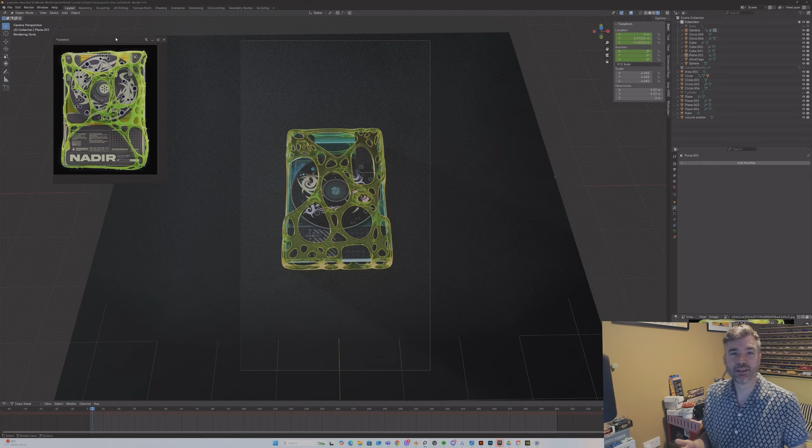Been a busy couple of weeks, but I'm back again with another tutorial where I take one of the reference shots that I found on Pinterest, which is always my go-to, and attempted to recreate it in Blender. And I really like this tutorial because it's one of those projects where years ago when I was starting out with Blender, I would never have thought I'd be able to make something like this. And even just looking at it when I started trying to recreate this, I was like, how am I going to make any of these parts? And it turns out that actually all the parts are really simple.

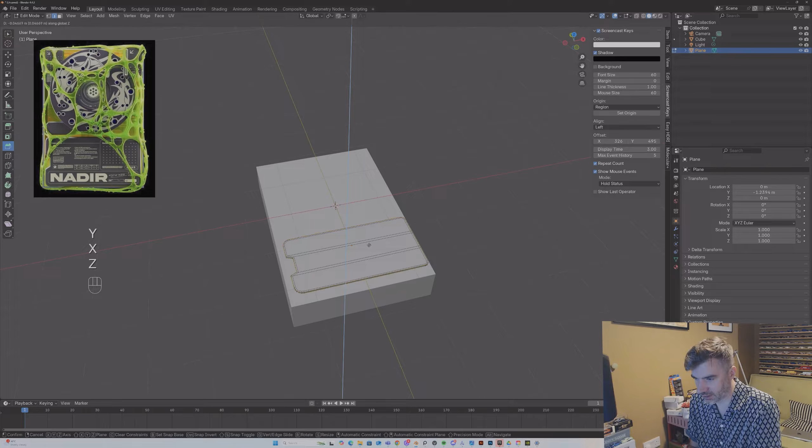But I do want to make like a little lip. Can you see there's like a metallic lip that runs all the way around, and then this brushed powder coated surface on top. So hit A to select everything, hit I to inset, and then we'll just pull in like this. And then finally go into edge mode and alt click on the edge. It should select everything, and then we can hit E to extrude down, and hit Z, and just give it a little bit of depth like that.

And there we go. Shade auto smooth, and we should have something that for our purposes looks good. So let's position this properly. Looks like it's a little bit off, and we'll have it just resting on the surface like that. Cool. So now let's build each of these other four. So it's going to be the same process. So we're going to make a new plane.

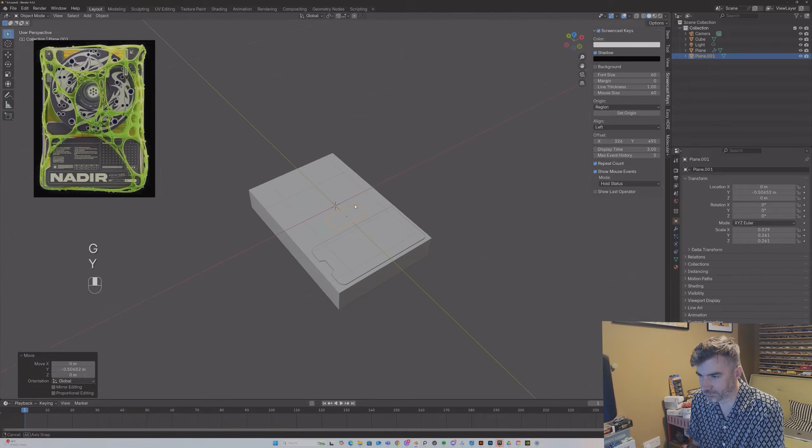So this one, because we can't really see what's going on underneath, I'm just going to bevel all of them with an angular bevel. So scale down, and I want this to be long and thin, so something like that. Just scale a whole lot. Doesn't need to be exactly the same. Just going to get roughly.

Let's work from overhead. Something that's worth doing at this point is to go to our drop down on shading and change this to random so that every object has a different colour. It makes it much easier to see what we're doing. None of this will render, it's just for viewport purposes.

Okay, so we're just going to apply the scale before we go any further so that our vertices bevel correctly. And with those selected, make sure you got bevel and drag, and nothing will happen until you change that to vertices, and it's going to be too big. So we'll scale it back to there. Honestly, that should be all we need.

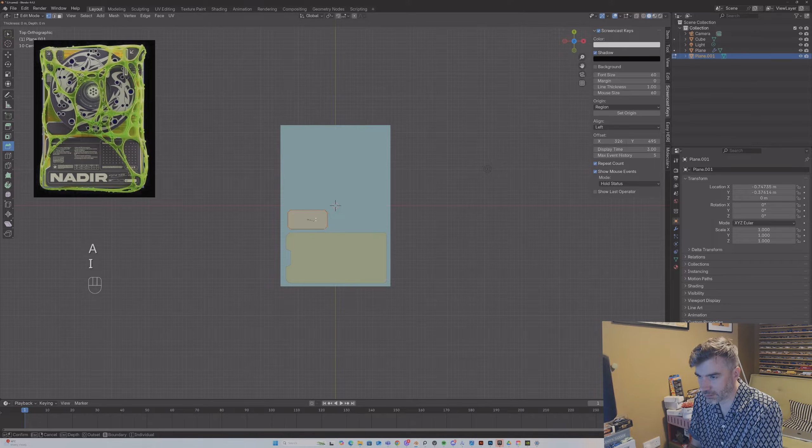And we'll just hit 3 to make sure we're in face mode. Hit A to select everything, I to inset, and it might be too sensitive, but there we go. So we'll try and keep our bevels pretty consistent. Something like that. And then we're just going to select these edges, extrude down. Just maybe a little bit deep. And we'll just pull this one down into place as well. Okay, so that's two done.

And let's tackle this top one. I think we could actually just use the same piece. The only one that looks different is this one here. So let's use the same one for the top. So we'll move it up. And you can see because we duplicated it, it's changed a different colour because it's a different object.

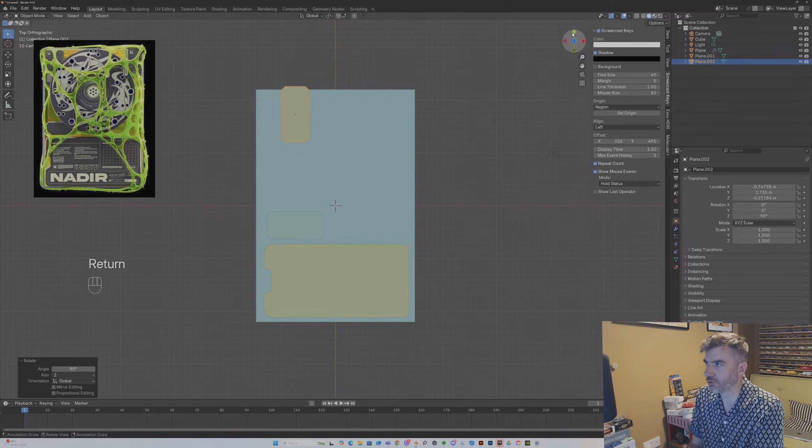We're going to rotate it 90 degrees. Let's snap to the top view. And let's position it something like that. And then we're going to tab into edit mode and make sure you've got X-ray selected. We're going to drag a box around all of these and pull it down so we get something like this.

I can see now actually that this tapers in, so that's kind of easy enough to do without remaking everything. So let's put a cut in the centre there, and because of how our geometry is formed, we need to put a cut across. So we're going to do Control R and put a cut there. And if we select those two vertices, we can just hit J. And now we can drag all of this down, something like that.

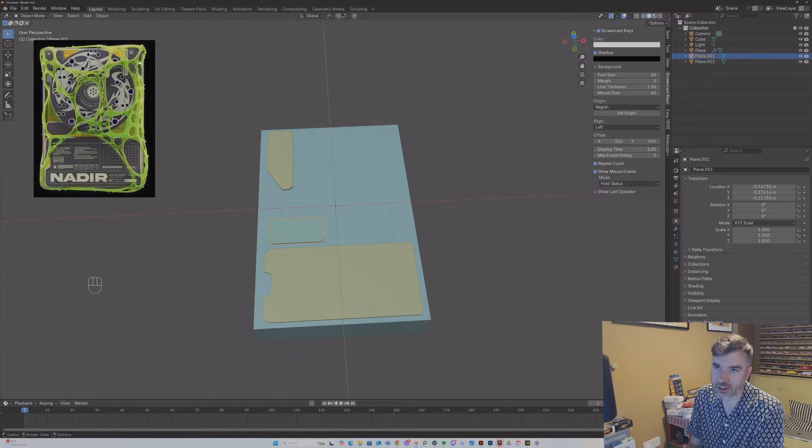And then I'm just going to move this in like that. And this is going to be covered by our spinning CD thing anyway, so it just might add a more interesting shape. Turn off X-ray and see how we're looking. And let's take this object and do the same thing again, and we'll try and work in a little detail in the corner. So snap to overhead view, and again it's a different colour.

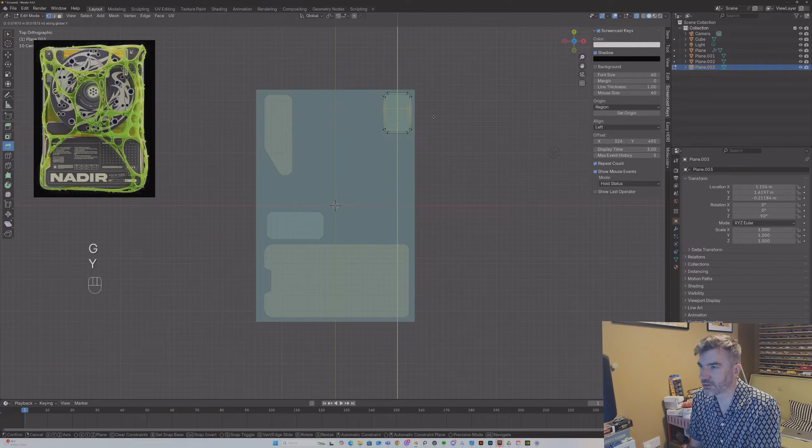We'll rotate it through 90 degrees on the Z-axis, pull into the corner, turn on X-ray, and we're just going to select these vertices, and this one wants to be much smaller. And so let's put our cut in there with Control R and our cut there, and then just join them up. And now we can select these. So I think if we do another cut there, Control R, another cut there, Control R, Shift, select them, and then J to join up.

And then if we just select all of these, hit S to scale on the Y axis, and then type in 0, it'll straighten it out. And then we can move this up, and then let's try pulling this over to the side like that. And maybe this wants to pull down a little bit. There we go. This is more interesting than it was before, and it adds a bit of variety. So it's completely up to you how you want these to look.

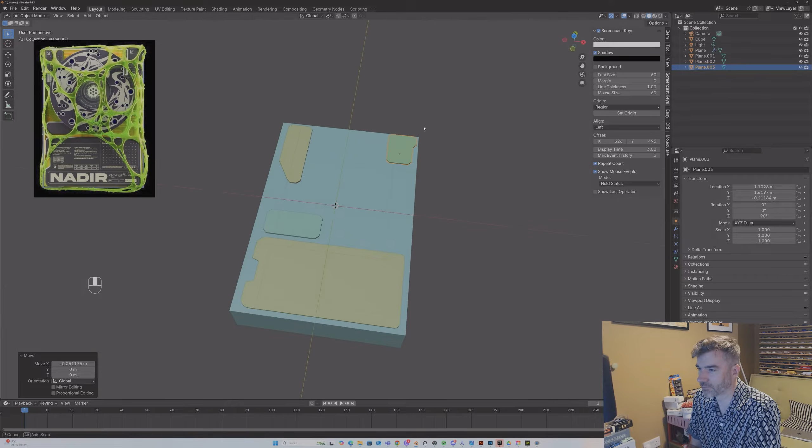Okay, so that's all of our metal plates. What I want to do now is put a slight bevel on everything. So we're going to select this one, go to modifier, add modifier, search, and mine's up there already, but if it's not, type in bevel, and that's kind of what we're going for, but it's a little bit pronounced. Hang on, let's just drag this up and down. There we go. So because we've applied our scale, everything's working as it should do.

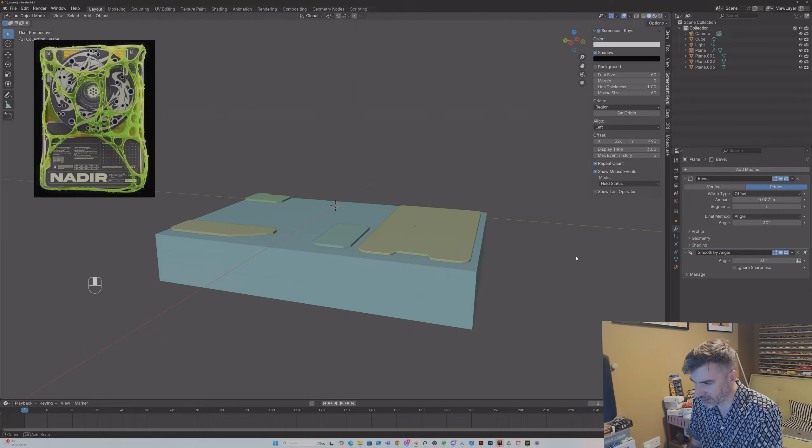Sometimes you might need to go to geometry and turn off clamp overlap, but it looks like we're okay here. So we're just going to scale this until we get something like that. So it's just got a little highlight edge, it'll just catch the light better. And we want to apply that to everything else. Rather than having to manually create our bevel, if we select all of these, shift select, and then select this one last, hit Control and L and choose copy modifiers, now everything's nicely beveled and it's looking better already.

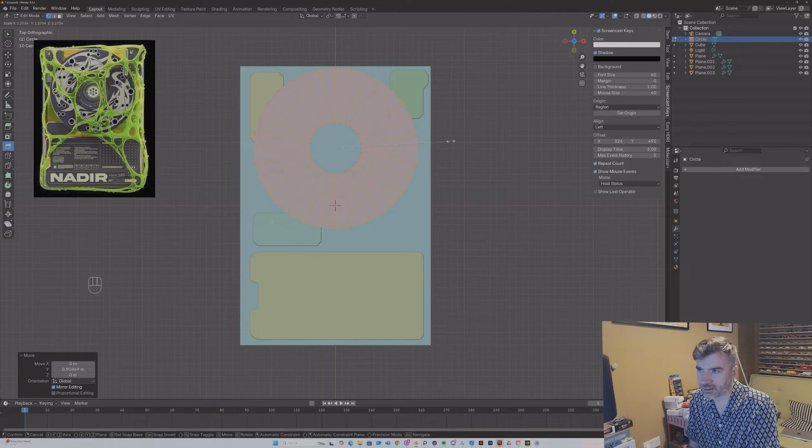Okay, so let's make a placeholder for this CD shape. So Shift A, mesh, and we'll do circle, and we'll just pull it up a little bit, and all we're going to do is tab, hit E to extrude, S to scale, and pull this in, something like that. And then let's go to our top view, select everything with the A key, and we can pull it up and position it, so it's going to be something like that. And now let's pull this down, so this wants to sit above these plates, but this one then sits above that.

And let's just select everything, push the 3 key to go into face mode, then hit E to extrude and pull this down. So I've just got a little bit of depth. That's maybe a bit thick for a CD, but it's just so we can make sure that everything sits as it should do. Okay, and then all of this stuff we can add in later on when we do our detail pass, but let's make a placeholder for the center as well.

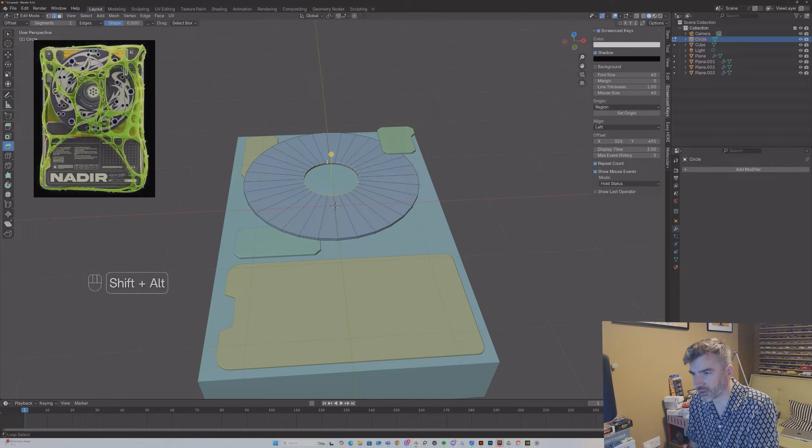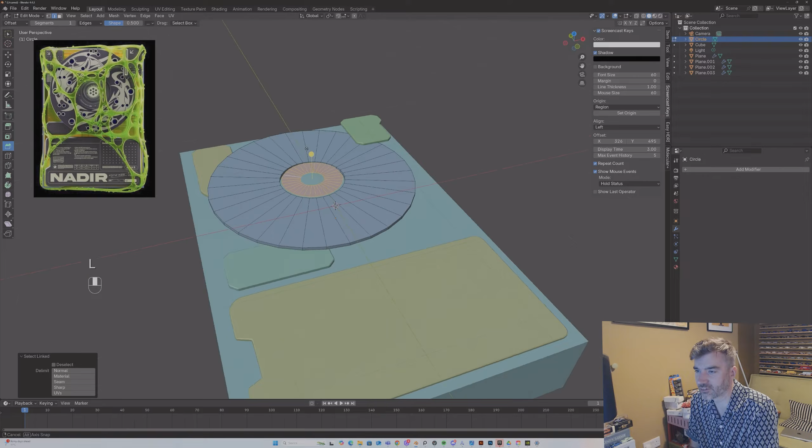So we're going to select all of this, Alt Shift, and then click on an edge, Shift and D to duplicate, and then S to scale, so we know that that's matching up, and then we'll hit E to extrude again and scale. Whoops, sometimes it gets a bit weird. We don't want to hit A because it's going to select everything at once, so if we now hover over and hit the L key, select linked, and then hit E to extrude and pull that down. Okay, so we've got the basis of everything in place.

And then the last thing we need to do is put another box over the top that's going to be our mesh. So we're just going to select this one, duplicate it, Shift and D, and we're just going to scale it out slightly and pull it up to make sure it's covering everything. And then if we select this bottom face, pull it down, and there we go.

So now will be a good time to just name everything. So we will name this one, I will call it slime mesh because I can't think of a better name, and we'll just hide that for now. And then we're going to call this acrylic box. I'm just using F2 to rename everything.

And then this plane, we'll call this, I think they look a bit like dog tags, like military dog tags, so I'm just going to call them that for now. Dog tag 1, dog tag big, and then we've got dog tag small center, dog tag top left, dog tag top right, and then we're going to select all of these.

Oh, we forgot to name the CD, so we know that's a circle. We can do that in a second. I'm going to select all of these, control clicking, including the hidden slime mesh, then hit M, move to new collection, and we're going to call this guide mesh. We are going to end up using a lot of these for our final geometry, but I like to keep everything organised like this. So acrylic box also needs dragging into guide mesh.

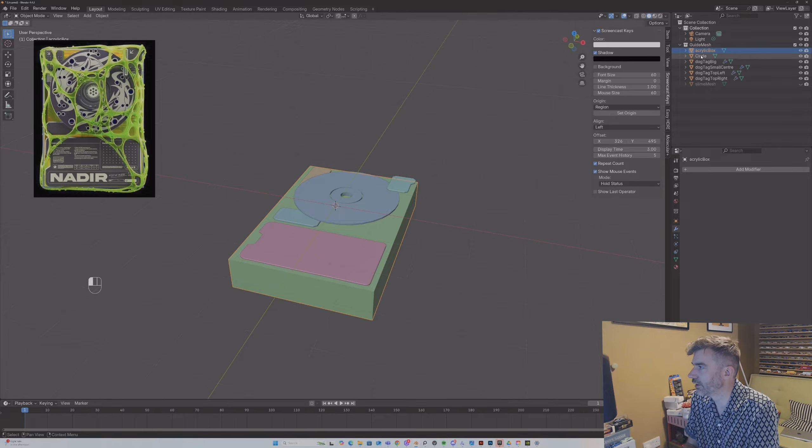Here we go. So I'm just going to call this CD. And let's see how we're looking. It's interesting, every time you name something it gives it a new colour. Cool. I'm actually just going to duplicate our bevel onto the acrylic block, so we'll select the box first and then the dog tag next. Control L, copy modifiers, and again everything just looks a bit nicer with a bevel.

We'll leave the CD for now, but now is a very good time to save. Can't think of a good name, so we'll call it Slime Drive 1. As you'll know from my tutorials, I like to put a number after everything so I can save incrementally, and that means that I can roll back to an old version if there's a crash or I just run out of undos. So I'll hit save as.

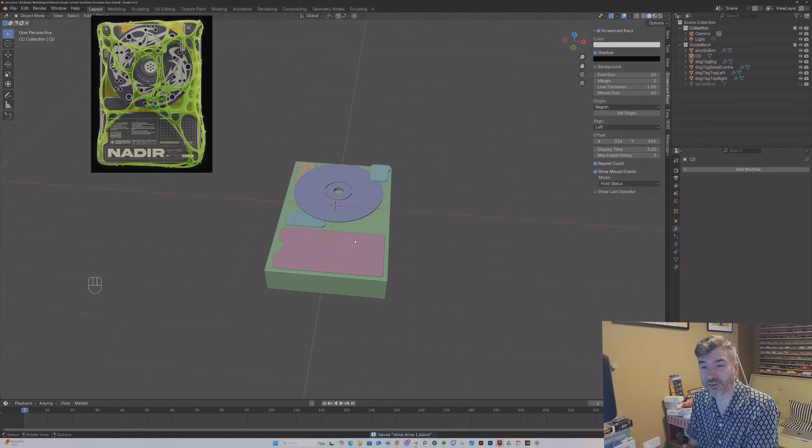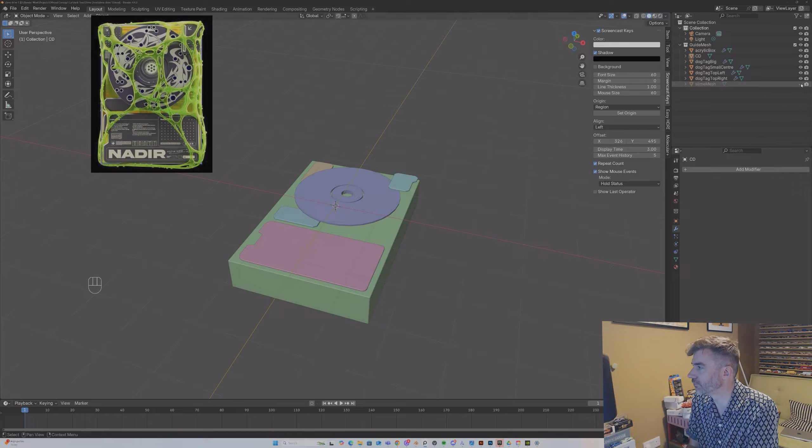Okay, so let's get into the real meat of this. So the two most difficult things to make, or the things that look like they're going to be most difficult, are this CD and this slime netty grid thing. So let's do that first. So we've got this mesh, and what we're going to start to do is cut into the faces using the knife tool roughly where we want these bubbles to form. So we're going to start at the top and we're just going to cut loose shapes out. Now mine's not going to match perfectly, but we basically want to make a face everywhere that we're going to put one of these bubbles in.

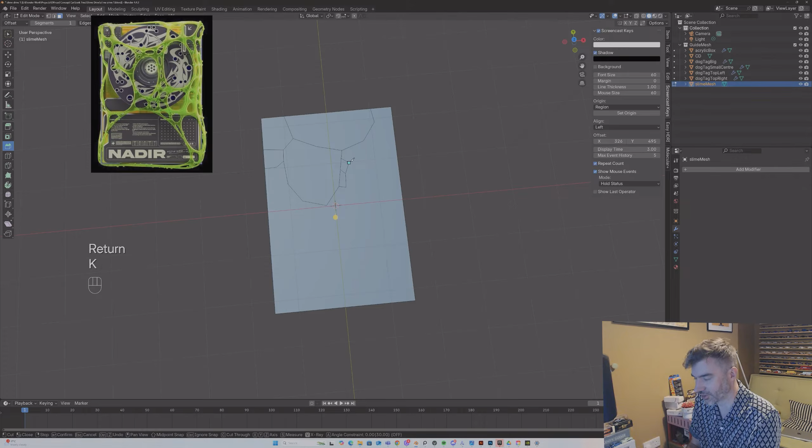So you do not have to follow me, you don't have to follow the reference. The more kind of random you can make it, the better. But we just want to keep linking back up to points. So we're cutting with the knife tool, using the K key to reselect it every time. And maybe let's make some little ones in here. Something like this. And this is horrible topology, but it doesn't actually matter for what we're doing. So we'll just keep making these cuts.

Back into knife mode. Let's make another big one here, and you can cut them right up to the edges, and we'll extend round the sides in a bit. So we're just going to keep making these shapes. And like I said, it doesn't matter how closely yours follows the reference or follows mine. This is your own piece of work, so the more interesting and unique you can make it, the better. No idea what I'm going to end up with here. And we'll just find some kind of links between here.

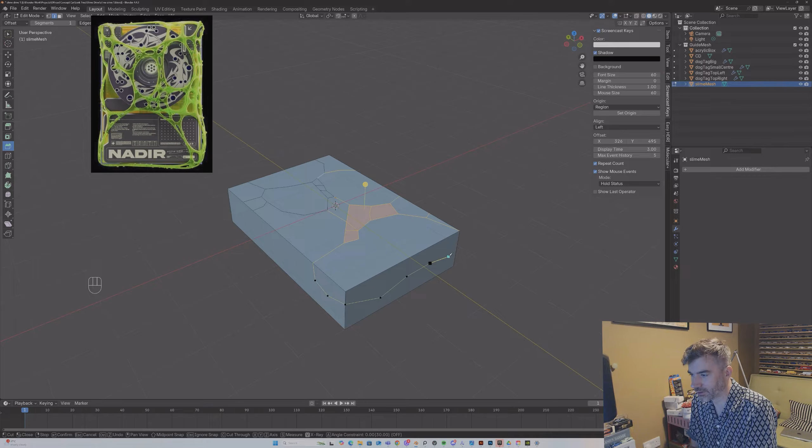So we're going to apply a bunch of modifiers in a second to make this the effect that we want. We need to think a little bit about what happens around here as well. So let's carry on looping around. Something like that. And then we'll link that to the corner. I think we're going to end up deleting this bottom face anyway. So I'm just going to speed through this a little bit more. You can take as much time as you want to make the effect that you want. So you can see we're building this like cracked, fractured shape.

And I know it looks bizarre at the moment, but I promise you it will look cool. Well, hopefully it will look cool when we finish. I want to keep this as an exposed circle as well, so we'll do something like that. Nearly done. And like anything in Blender, the more time you can spend getting it the way you want, the better. Let's put another cut through there.

Now the sides are less important because they're not going to be particularly visible in our final shot. You can see that we're mainly viewing from overhead, so I'll just keep linking these up. Okay. I think that should do us. So just check that we've got kind of interesting details all around, and then we're going to use our first modifier. So if we go to add modifier, search, and then type in wireframe, and this will already give you an idea of what we're going to do.

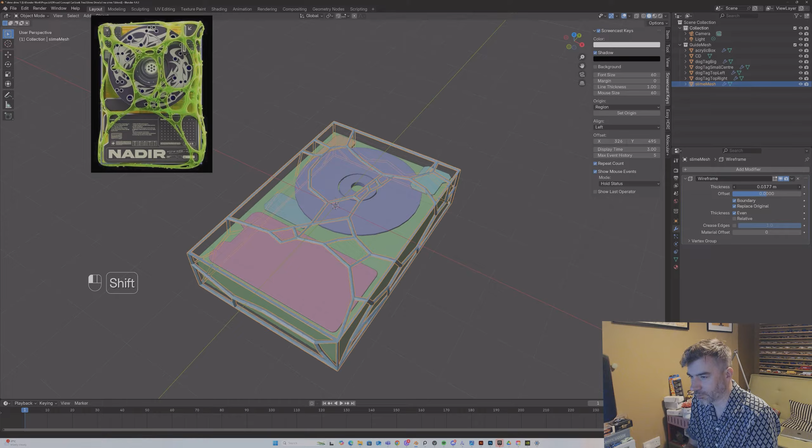So it's taken every one of those edges and turned it into geometry. So we've got the start of this, and we're just going to bump the thickness up a little bit. And you might notice that some bits look a bit uneven, or you might have some slightly crunchy geometry depending on how it's set up. So make sure you've turned on boundary, and we can play around with the thickness of this, but we'll get more of an idea of what's working when we've added our next modifier, which is our subdivision surface.

And you can now see some of the magic starting to happen. So we're going to bump this up to 2 for now. In fact, we might need to go for 3, and then right click and shade auto smooth. And you can now see that we've got this kind of bubbly, curvy, warped effect. And we're actually not too far off. If you want to add in some more smaller bubbles, we can select a face, right click and choose subdivide. And that didn't do anything, so we're going to do it manually.

Oh, I see why that happened. Okay, so if we can now select these 2 vertices and hit J, these 2 vertices and hit J, and then tab out, and you can see we've made some smaller bubbles. Maybe I want something, do I want to make this one smaller? Let's subdivide this face as well. I'm going to have to do the same thing, so we could just cut some more faces in. There we go, we've got some interesting stuff going on.

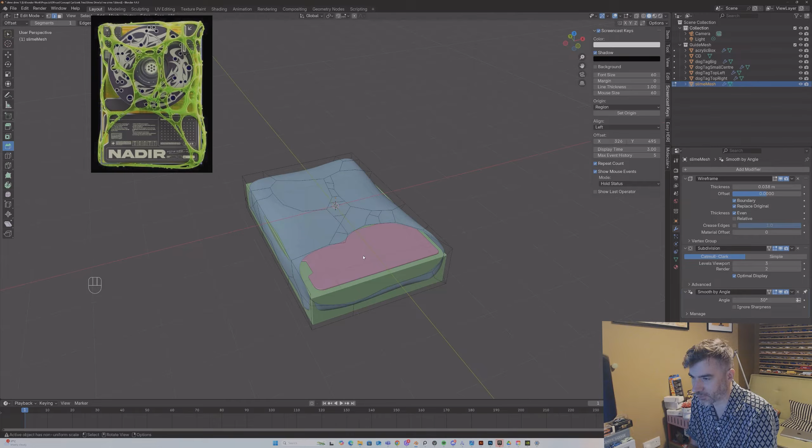And this edge here, I want this part to actually run over the side. So we can just select this edge, make sure you've got your edge selected, and then hit X and delete edges, and it looks like something scary's happened, but if we tab back in, you can see now it kind of runs over the side. And is there anywhere else I want to do that? Maybe at the top as well, so I'll do the same thing. Right, click on the edge, not right click, sorry, X, delete edges, and there we go.

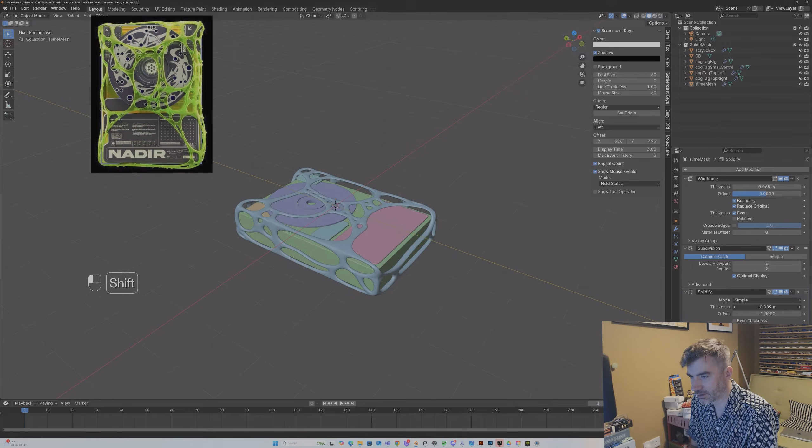And we can bump up the thickness a bit, make it look more organic. We can also add a solidify modifier at this point and put it at the bottom, and then if we increase the thickness, oh, things get a bit screwy if you go the wrong way. We can just give it a little bit more thickness and depth, which would be nice when we render our gel effect. So that was easier than anyone was expecting, right? I think I've made this a little bit thick now, so let's just turn down our wireframe but keep our thickness. There we go.

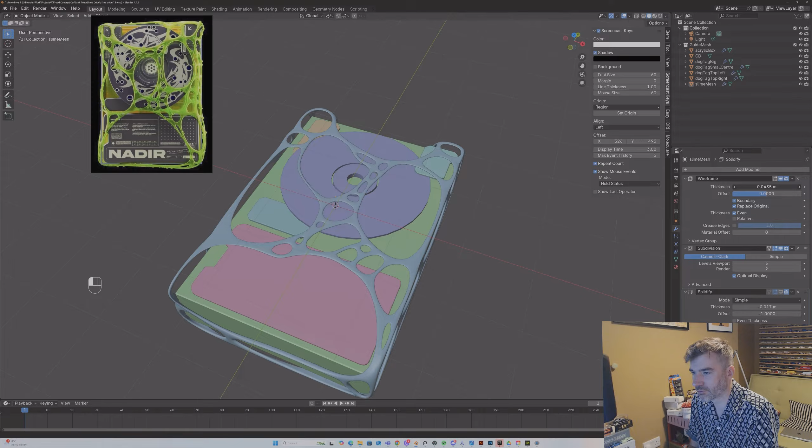Cool. It's looking nice. And you can keep going in and cutting and tweaking, and all of this is still editable. So if you tab back into edit mode, and especially if you turn off your solidify modifier, it might make it hard to see what's going on. You can keep changing the shape, adding in more cuts where you want them. So that's the beauty of modifiers, it's all fully editable. Like, you might decide that some bits are too weird and thick, and all of this can be changed and played around with. Cool, something like that should do us for now.

Nice. Okay, let's tackle the CD, the second scary part of our project. So I'm going to hit backslash, so I'll go into solo edit mode, and we're going to snap to the top view, and we're actually going to use this just as a guide because we're going to make everything from scratch again. So if I go to object, set origin, oh, my reference is in the way, set origin to geometry,

so it snaps back into center, shift S, cursor to selected, and then we're going to make a new circle, so mesh, circle, and now my reference is in the way here, let's put it there. I want to make this 64, and we're going to get it roughly to the size, and I'm actually just going to delete this because I don't want it for now.

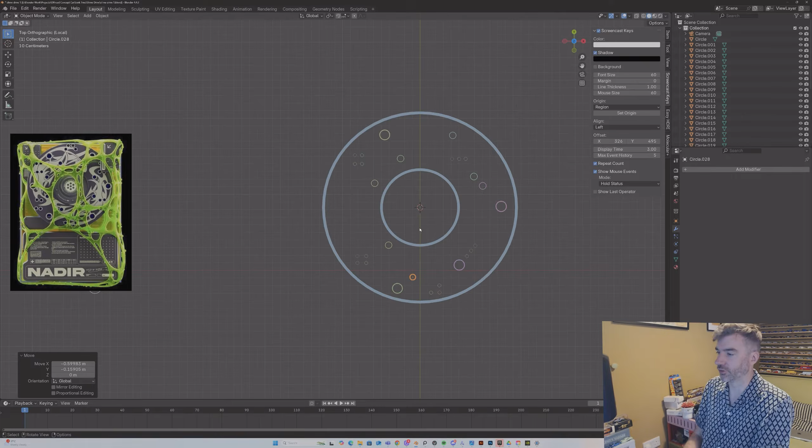So now what we need to do is select everything with the A key, and then select this part of our CD again and hit Ctrl and J so everything's joined. And now we're going to fill in all of these faces, which is way easier than you think. It looks like everything's selected already, which saves us a lot of work, but let's do it manually just in case yours aren't.

So Alt select the edge, Alt Shift and click, and we're going to click on each of these outer edges. So you might need to zoom in a little bit as you go. So we'll just work our way around, and this is an easy or a hard job depending on how much geometry you've made for yourself. So if you select anything by mistake, just undo, Control Z. So again, that's selected the wrong bit.

I'm going to have to zoom in a bit. That one's proving really tricky to select. Nearly done. One last tricky bit to do. And make sure you're selecting the outer loops, not the inner loops.

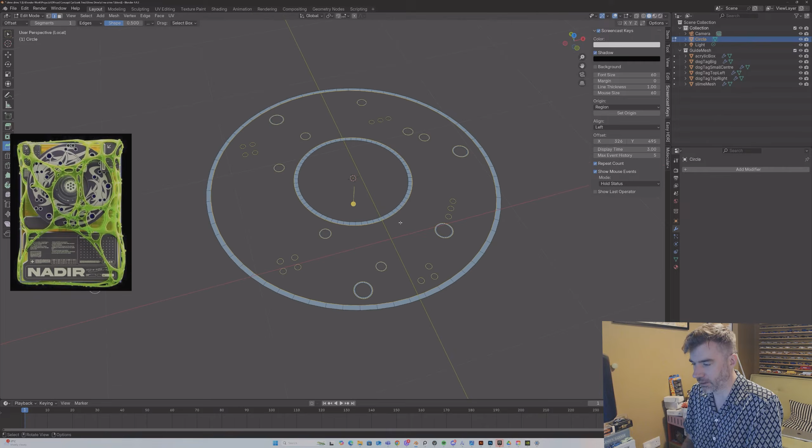Okay, perfect. So now all we need to do is fill the faces, and the shortcut for filling a face in Blender is F, but if we do that, it's going to fill all of the inner faces, and you can see it's a bit of a mess. So we're going to use Alt and F, and now we have this magic, and it's joined everything up neatly.

If you found that your geometry looks a bit weird, say it looks something like this, just select everything and scale on the Z-axis, make sure everything is flat, because sometimes things can get moved around.

So now we have the basis of our CD, and I'm just going to give it a bit of depth. So we're going to select that edge, and then, in fact, no, we'll just select this edge for now, so we're going to extrude down like this, pull down, and then if you look at the reference, there's like a little step down and then this clear plastic part. So let's carry on making that.

So Alt Shift select this edge, and then we're going to hit E to extrude, S to scale, and then we're going to hit G to put it down on the Z axis slightly. So we've got our step, E to extrude again to put an edge in, and then we'll just pull it into something like this. And we will look at if we want to make these cutouts in a second.

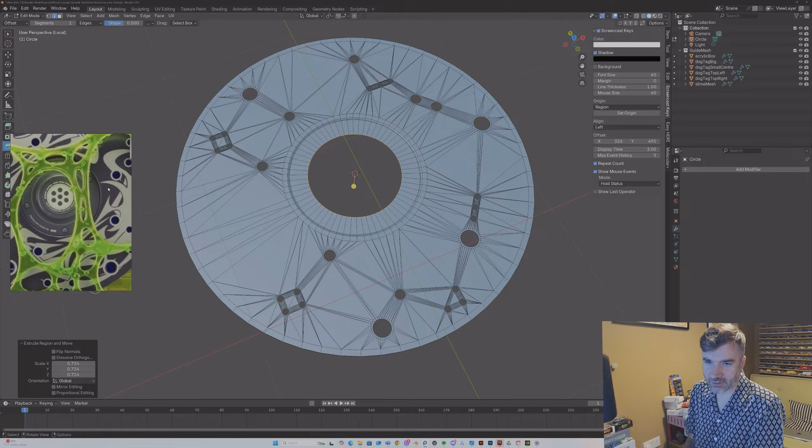Let's try and get a sense of the scale of this. So this wants to be bigger, and then it's a little bit hard to know what's going on here, like some kind of spindles coming through. I think that's how we're going to do it. So we'll just put another edge in there, and then we'll just hit E to extrude down on the Z. And I just want to give this a bevel as well. So I have modifier search, bevel, and let's see.

And we're going to increase the angle so that it doesn't... you see that when it's set to 30, it's stepping each of these edges. So we're going to bump it to 60, and then we're just going to reduce the size of it and put in an extra segment, and it just gives everything a nice effect. It'd be interesting to see if we apply a subdivision surface now what happens. I think it will work. So yeah, it's just smoothed over the edges, and we've kind of cheated our way to this nice geometry.

The only thing I've noticed is we haven't given these inner parts depth, so let's see if this works. So we're going to Alt select this edge and then go Select Similar, and we'll choose, let's try face angles. No, that's not the one I'm looking for. Amount of faces around edges. There we go. It's selected all of these.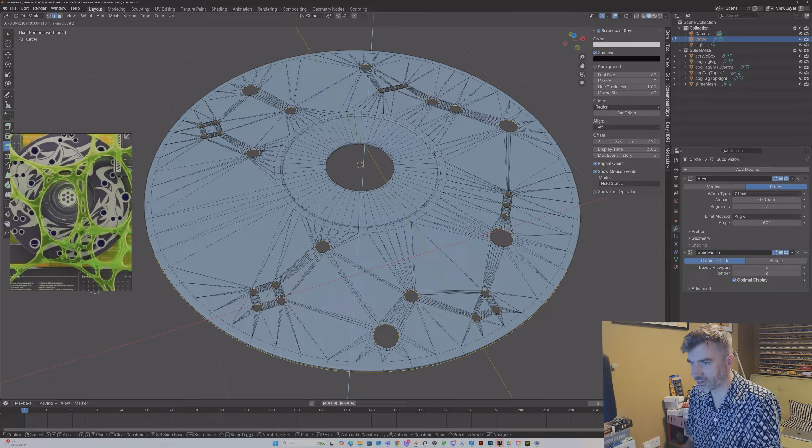It's also selected this, so we're just going to Alt Shift click on that to unselect, and then we can hit E to extrude down on the Z axis, and it might run a little bit slowly because it's trying to put bevel on it too. There you go, nice. So now I can tab back into our final piece. Because we're giving this a bit of depth now, let's select both of these and pull it up.

And let's quickly make this part in the centre, which again we're going to use the same technique to do, so it's going to be nice and easy. So we're going to start by selecting one of these edges, Alt Shift, and then Shift and D, S to scale, bring it in slightly, and then we're going to hit P to separate by selection. So now we should have this editable part. Backslash key to go in solo mode, and we'll flip to view over the top.

So we know we want a circle in the centre, but let's start by making a boundary edge. So A to select everything, make sure you've got edge selected, E to extrude, S to scale, so we've got a boundary there. And then in the centre we're going to make a Shift A circle, and it's way too big. In fact, let's delete that one and come out of edit mode, and we'll make our circle again so that it's a separate object. And you won't be able to see it, so let's type 0.2 so we can actually view the size.

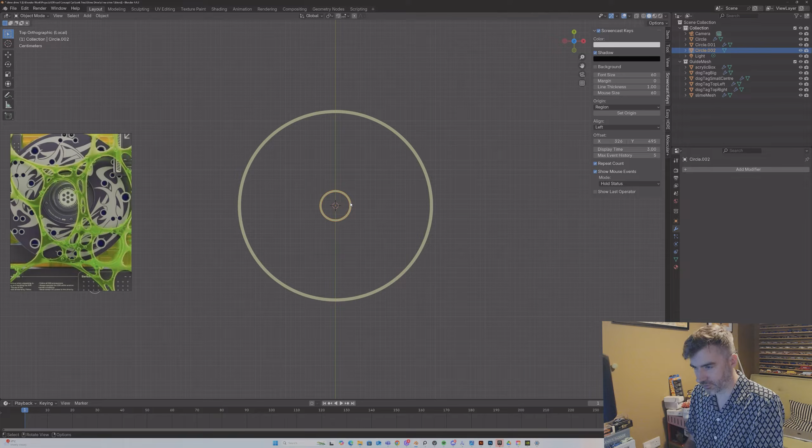So we want one in the centre, and then maybe like that kind of size, and then let's give it a boundary, scale, and then we'll go back into object mode, and then if we move this one up on the Y, something like this, and then we want to rotate it through 360 degrees, duplicating it as we go.

So if we hit the backspace key and choose 3D cursor and then hit rotate, it will now rotate around the center point. So we can now hit Shift and D, rotate, and rotate on the Z axis, and then we're just going to type in 360 divided by 6, and then we should be able to hit Shift and R to replicate that command, and there we go.

So we're going to do exactly the same trick, but there's actually like a little lip in here as well, so let's model that before we go any further. So we're going to select that edge, extrude and scale, and then we'll do extrude and scale again, and we'll pull that down in a second, but now we can extrude and scale one more time, pull that in fairly tight.

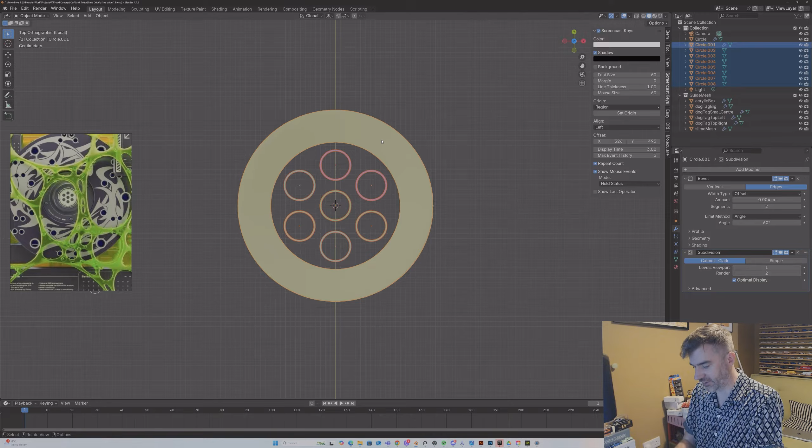And then you know the drill, so we're going to hit A to select everything, Shift, select this last, Control and J to join, and then select that edge, and then we'll work our way around, just holding down Alt and Shift as we go, and then Alt and F, and it will fill in our faces.

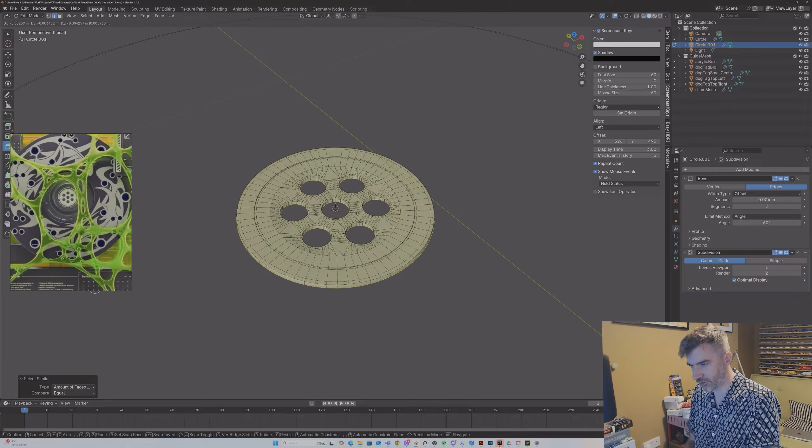And if we just select this edge, select loops, edge ring, and then you have to go into vertex mode and then into face mode. And we'll just hit E to extrude to pull that down slightly. And then let's select that edge, Alt Shift, select similar amount of faces around edge, and it will select all of these inner ones and that outer loop, which is exactly what we want. And then we'll just hit E to extrude and Z to pull down. And there we go, we've got our central detail.

So we're just going to select this one and then select that, and then hit Control L, copy modifiers, and it should take over our bevel and our subdivision. And things are looking real nice. Okay, so we're just going to save before we move on to the next part. Just check we've not got any geometry crashing into anything. I think we're good. So File, Save Incremental.

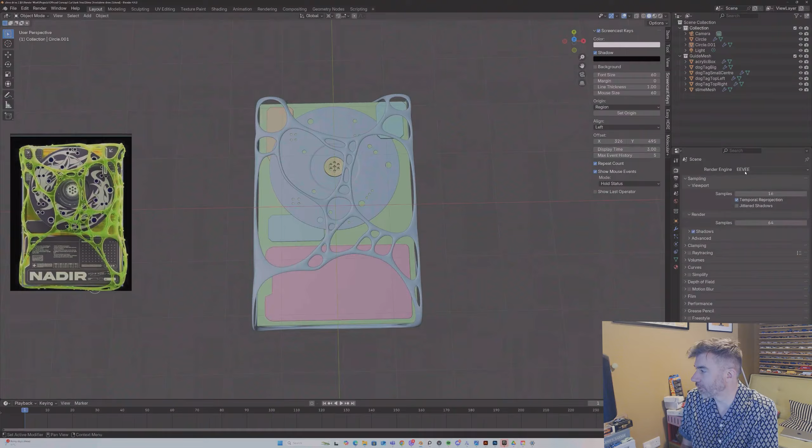So the next thing I want to get into is setting up our cameras and our lighting, and then we will look at doing our materials, and we're actually well over halfway into this project now. So I'm just going to go over and set my render engine to Cycles and turn on GPU compute, and then if we push into viewport shading, this is where we're at the moment. So I want to delete this light that we've got, and I'm going to bring in an HDRI, which I'm using the Easy HDRI plugin.

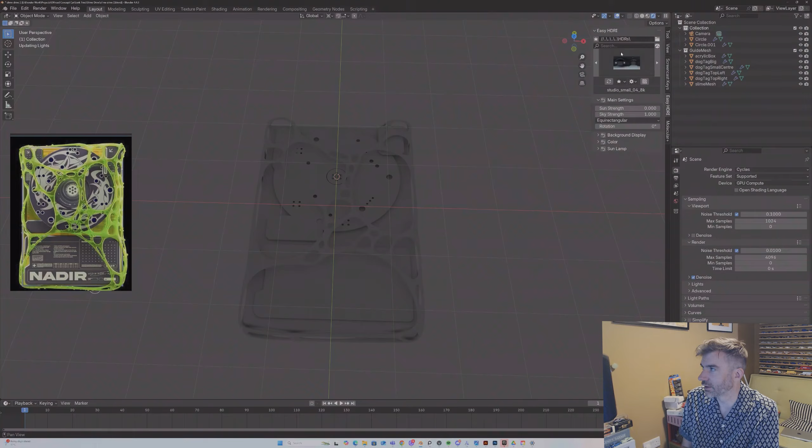I'm going to use the studio lighting for this, and then we hit create world nodes, and we've already got some much better lighting going on. So under render properties, we're going to go to film and choose transparent, and I'm just going to turn this down to 0.6, and then I want to add in a plane underneath. So Shift A, mesh plane, and we'll scale that out and just pull that down under our object.

And we'll just go into viewport shading, just for speed. In fact, let's use this mode so we can see everything. Okay, and then let's position our camera. So if we hit this button here to toggle camera view, we've already got a camera in the scene. If for some reason you haven't, hit Shift and A and go to camera, but there should be one by default. And then we're going to go to view and camera to view.

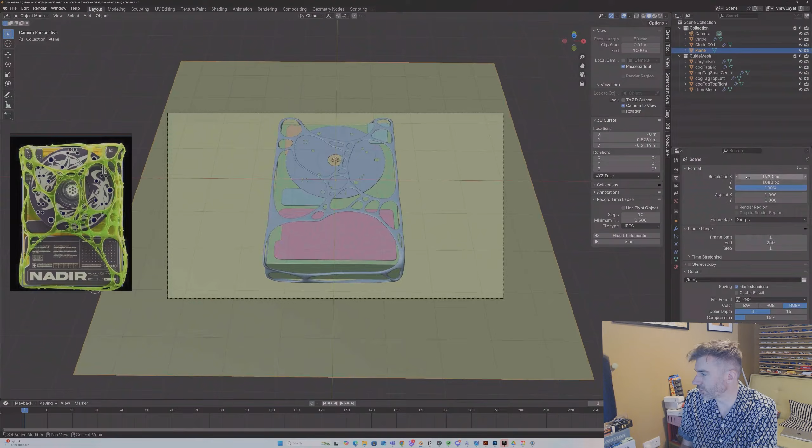And then let's try and match our shot as best we can, or however you want this composition to be. And I'm going to change the proportions so that we are, let's say 1080 by 1080, so a square. So something like this. Maybe a bit more. Yeah, something like that. And again, we can tweak this, it's only rough. And then when you've got something that you're happy with, turn off camera to view so that if I move my mouse away now, I can then hit that button and go back. So it's useful for making changes and keeping your view locked.

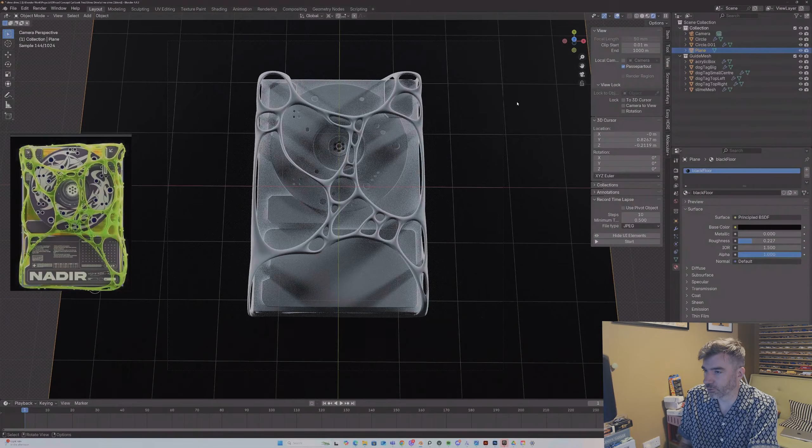So we'll go back into render mode, and I'm just going to give this a new material. So let's call this black floor, and we'll set the base color to black. And let's bring our roughness down so it's got a bit of reflection in it. And then I want to make another light. I'm going to make an area light.

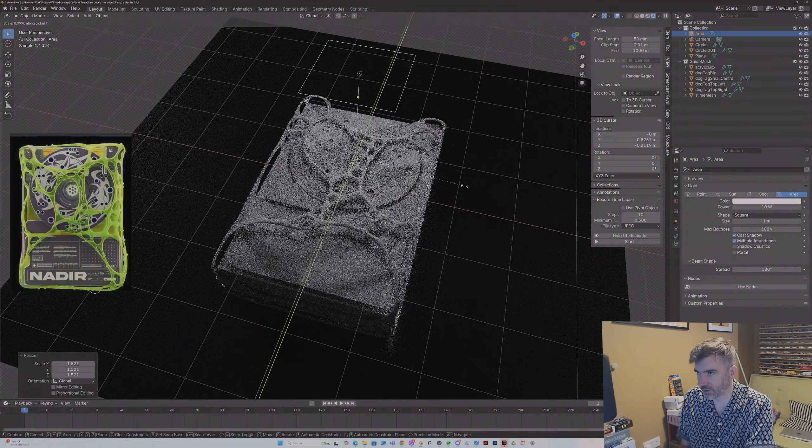So let's hit the camera view to the side. Shift and A, mesh. No, not mesh. Light, area. And I want to pull this above. And I'm going to scale it. Scale it on the Y. And we'll just pull it above a little bit more.

So it should be sitting pretty much straight down, looking on top of your object. And now you can see we've got a much nicer, more studio type lighting.

Another thing I'd like to turn on when I'm editing my composition is to select our camera, and where it says viewport display, this section here, passepartout, I think that's, I don't know, I'm going to look up how you say that. Just pull that to 100%, it blacks out all the detail that you're not looking at, so you can really concentrate on getting this looking right. So I think we're in a good place with this.

So now we're going to create the first passes of the materials so we can see everything we're working with. So let's start with this one, and we'll just hit new, and we will set this to like a lime neon green, and we'll just call this slime material. Don't worry, we're going to make this properly. This is just so that we can check what materials we need to make.

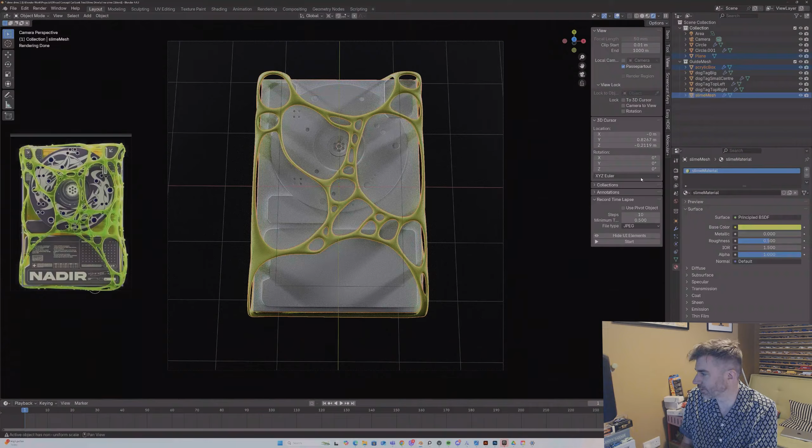And we'll select this one as well, so the block behind, and we'll call this acrylic. And let's set the base colour to something similar, like kind of yellowy green, and that's fine for now. And then let's just select one of these dog tags for now, and we'll use backslash to edit it, and we need to make 2 materials here. So we're going to hit the plus button and make 2 slots.

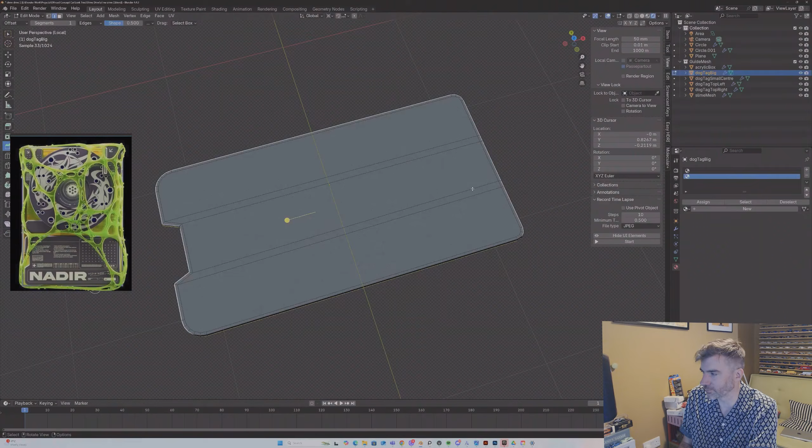And let's select the first one, and we'll call this one shiny metal, and we will make this like a grey, light grey. Turn the metallic up full and the roughness down, and we won't see much because of how our lighting is, so we're going to tweak that. We should have like a metallic surface, and then we're going to tab into edit mode, and then we want to select these faces here, and then we're going to select the second material and hit assign, and nothing's going to happen yet because we don't have a material in there.

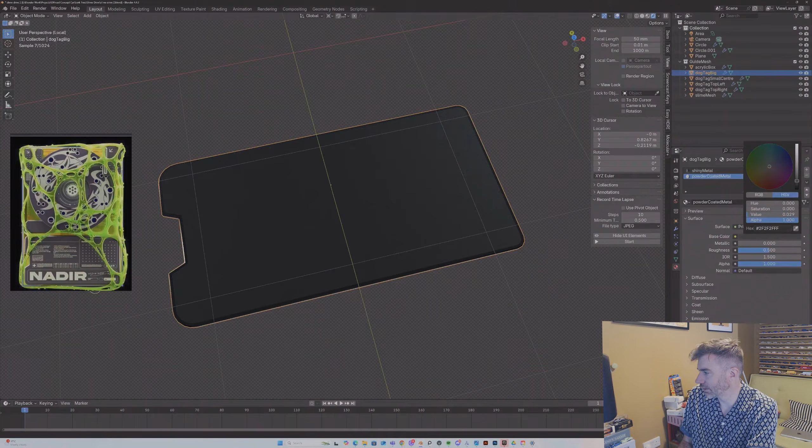So we'll make our new material and we'll call this powder coated metal, and we'll make this a dark grey. And we'll dial up the roughness. We'll make it metallic as well, but we'll really dial up the roughness. So you're not going to see a huge amount until we get back into our full scene mode, but you should now see we have this metallic highlight running all the way around. So we're going to do this on all the other objects.

So let's just select these and then hit Control and L and link materials, and it's going to make everything the shiny chrome because that's the first material we have. But you'll see we've got 2 slots in there, so let's just select these. Not the area light. Select these 4. Backslash to edit, and then we can just work our way around. Select the second material and hit assign. And again, it's a little bit hard to see in this scene, but trust the process, it is working.

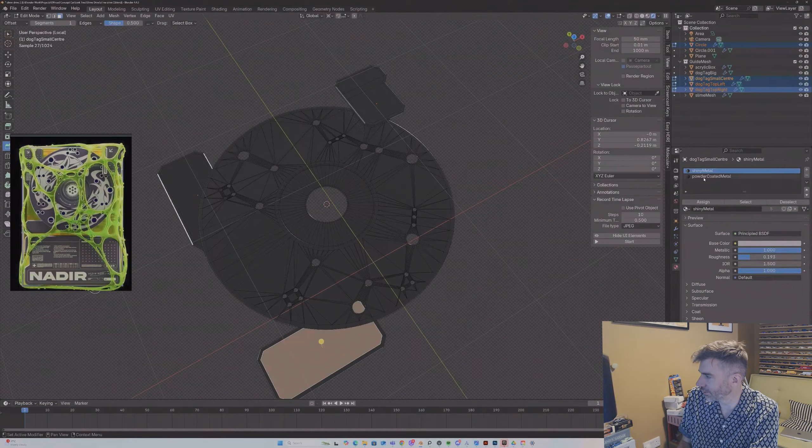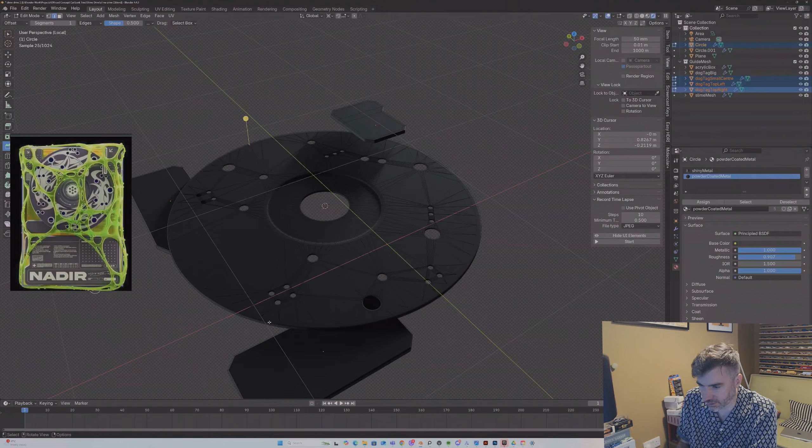And then this is going to be very tricky, so I think the easiest way to do it would be to select everything and assign it to powder coated metal. And we're going to bring in all of these patterns and textures later on anyway, but let's concentrate on getting the base materials in. So let's just go into this mode so we can see better.

We're going to select all of these edges like this, and I don't think we actually need to select that one, but we do need to select every one of these edges as well. So let's use the trick we used before we get too far into this. Alt Shift, so select one of these edges, and then we'll go select similar amount of faces around the edge. That did not work now because we've got so many other edges, so we're going to have to do this the boring way. So I might just time lapse this, but we're going to work our way around and select all of these edges.

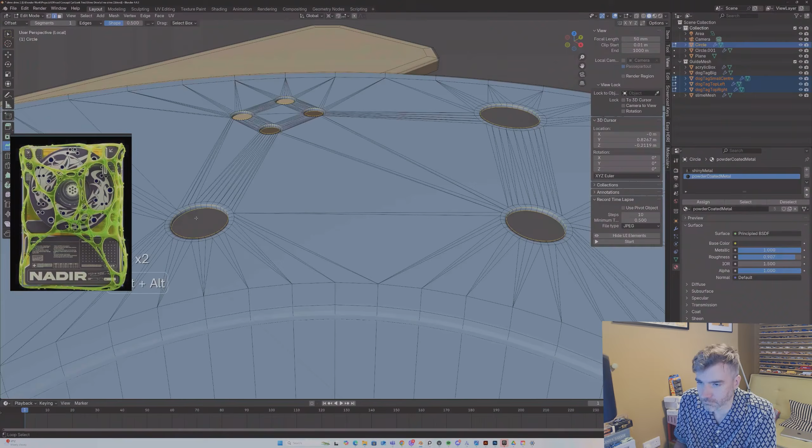Okay, and with all of those selected, we're just going to select these 2. In fact, I've got 3 there. We're going to select all of those edge loops, and then select the vertex, and then select the face. And then we actually just want to select one more loop around. So if we go to select more and choose more like that, perfect. That's everything we need now, and now we can apply our shiny metal again.

And then if we go back into our main scene, go back to render view. Okay, so this has given me a kind of bullet hole effect, which is kind of cool, but I don't want this for this scene. I'm just going to turn off subdivision for now, and that will fix our problem. You can see that it still looks rounded enough. Also, we're going to turn on auto smooth. There we go.

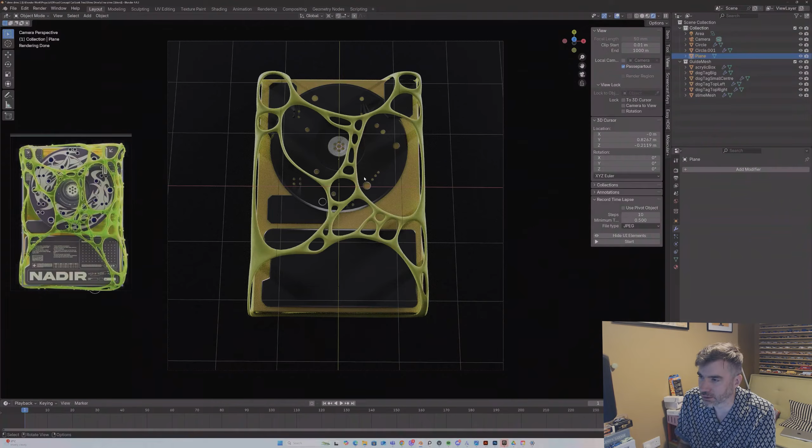And great. So that's all of our materials made, and the next thing we need to do is let's have a look at the slime, which is going to be pretty easy to put together, but we're just going to save before we progress. So let's save incremental. So we're going to go up to the shading tab with our slime mesh selected, and let's bring our camera into the right view, and let's also make sure we're in rendering mode.

Okay, so we're actually going to delete this principled BSDF. So everything will go super black, and we're going to make a glass BSDF, and we're also going to make a transparent BSDF. I always get those two mixed up. And just make sure you've got the node wrangler turned on. So preferences, add-ons, node wrangler. It just makes it easy to preview things as we go.

So what we're going to do is mix these two together. So we're going to go search, mix shader, and we're just going to connect these two together. Connect that to the surface, and we should have like a completely glass see-through material, which might be what you want, it might not. I'm going to bring my roughness up, and I'm going to give it a lime green type material, and now you can see we've got this kind of gel-like shader, and depending on where you move the factor here, you can make things more or less translucent. So I want something like this. That's looking pretty cool already.

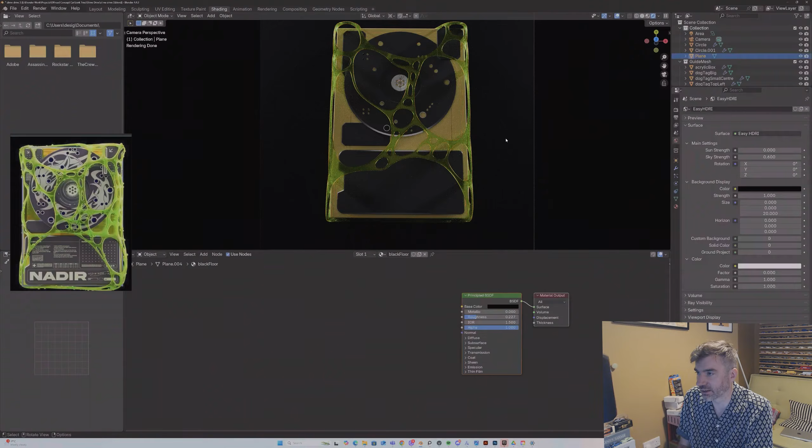I also want to add like a neon, almost like a fluorescent glow to the edges. So we're going to use a Fresnel node, and if we Control-Shift-Click on that, you're not going to see a lot going on. Let me just rotate my camera. So we're going to need to put in a color ramp. Oh, hang on, here we go. We need to move our index of refraction first. So we just want it to kind of pick out the edges. It's a little bit hard to see. Let's put a color ramp in as well.

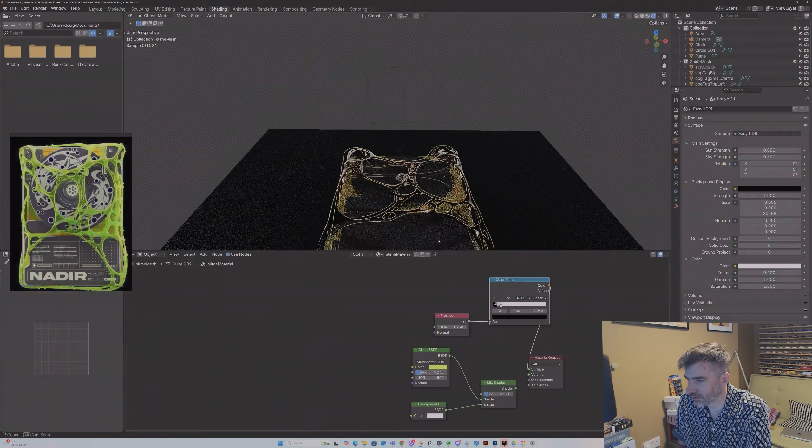And then, make sure we're previewing that, so Control and Shift to preview that edge. And then we can pull these edges in tighter. And let's mess about with our index of refraction. So we want something like this, so that it's kind of darker in the centre and glowing at the edges.

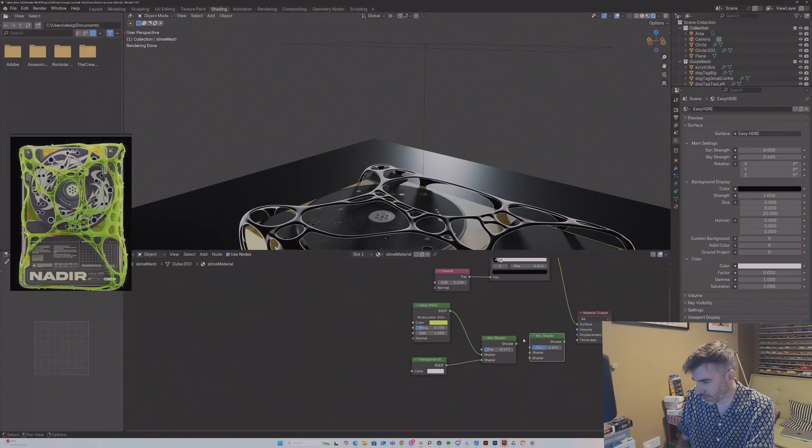And now we can connect another mix shader in. So we're going to connect one into that section and another into surface. So the shader in surface, and we're going to select the colour ramp out into the factor. And then if we make another shader, so we're going to make an emission shader here, and you can see now it's glowing at the edges. So let's make it more of a yellow. And then we can pull down the strength. Something like that. Let's go back to our camera view.

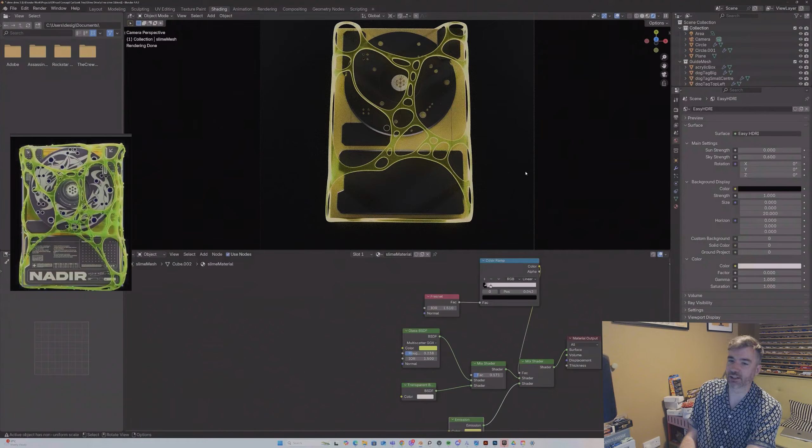So you can up the strength to get more of an edge glow like that, or you can pull it down, something like that. And you can also then play around with the index of refraction, and it'd be little movements because suddenly it'll snap into. But I think I want something like that. Cool. And you might want to play around with the colours. You might want something a darker green. It's all up to you.

And let's do the same thing on this material. So it's basically the same kind of material. We'll delete that. Make sure you're just deleting the principled BSDF. And we'll go search. Glass BSDF. Transparent BSDF. And then we're going to make a mix shader. That's the surface, and then we can play around with the factor, increase the roughness, and give it a kind of greeny yellow gel colour. And that's the basis of our acrylic type material.

And again, if you pull it all the way over to the left, you get a much more solid resin. If you pull it all the way over to the right, it's almost completely clear, and because it's sat on a black background, we're not seeing much.

Perfect. Okay, the next thing I want to do is give this background section a texture. So we'll go Shift A, and let's make a Voronoi texture. What I want to do is alter the roughness, so parts of it are shiny and parts of it are less shiny. So if we Control Shift on this, and if we play around with the scale, you can see we've got some spots, so let's make it something like this. So for me it's about 6.

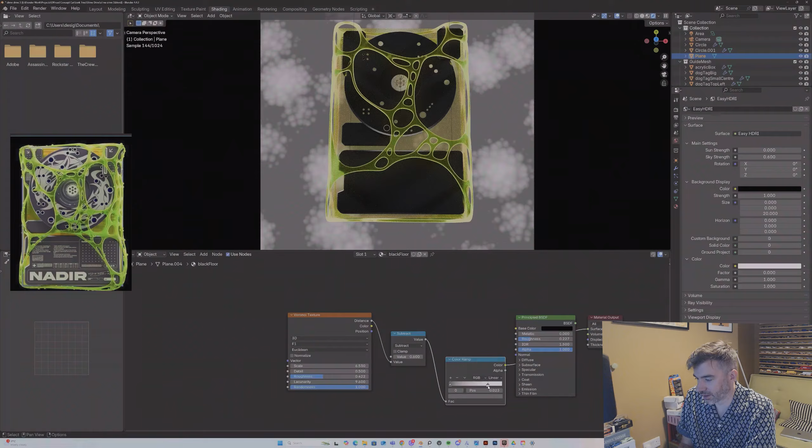Detail like that. I know it looks a bit weird at the moment, but if we now connect a color ramp into here, and then Control Shift on this one, we can just tighten these values up a little bit more. I'm going to make this a dark grey, and this a slightly lighter grey, and then we're going to connect that to the roughness of our surface.

It's hard to really spot, but you can see we've got all these little marks and blemishes, and a layer of dirt that looks a little bit more realistic. You might not be able to see it on your screen, but I've got these little highlights and spots that do make a difference to the final render.

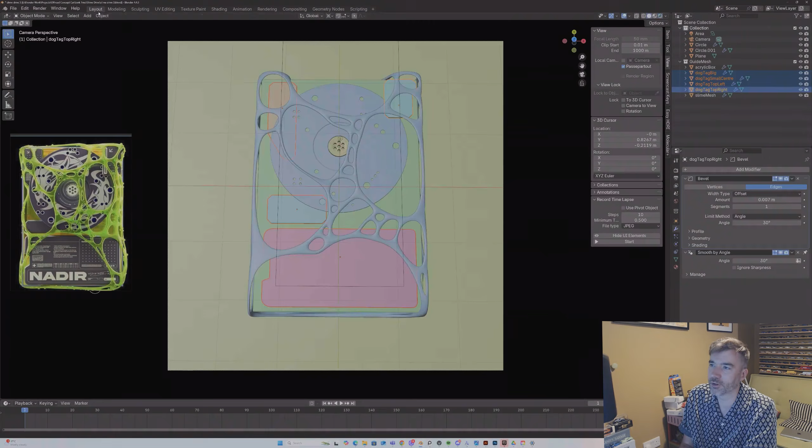Okay, so now we're going to tackle this texture and these patterns here. It's very easy to do. We're going to select these four, go into local mode, backslash to view them separately, view from above, and hit the Tab key. Because we've got all four selected, if I now hit A, everything selects, and we're going to go UV, project from view, and now we'll change to our UV editing tab.

So what we've done is we've created a flat layout of these four objects, and if we scale all of these up now, sorry, my mouse is being a bit overly sensitive, we want them to fit in this box, and we can pick these up, bring them down and scale up again.

What we're going to do is export this layout into an image editor. So go to UV, let's just move this out of the way, export UV layout, and give it a nice easy name, so dog tag UVs. I want to set this to 4096, so it's a nice high resolution 4K image. Then we hit export UV layout, and then it's time to load an image editor of your choice.

So I've loaded this into Photoshop, and here is my UV map. We're just going to name this layer UV map so you can see it. I have this image that I've already put together of components that I'm going to use. It's a case of finding elements on Pinterest, stock image sites, creating your own stuff. I'm just going to paste it in and lay it out onto my tags. I will let you work out how yours are going to look, and I will meet you in a minute with the finished ones.

So this is my final layout. I'm just going to put a white layer underneath. There we go. Then I'm going to turn off my UV map, and save this out as a Photoshop file, but you can export it to JPEG. So it's dog tag UVs. I'm just going to give it a pattern, and there we go. Back in Blender, we go into our shading mode.

What we should be able to do is Shift A, search image texture, and load this in. And if we Control Shift, we'll now see our patterns laid out. And we're going to use this as a mask.

So we want to cut to the shiny material that's underneath. So I'll just disconnect this for a second, go back to our principled shader. And if we choose this, we can select this principled BSDF. So we're selecting our shiny metal and then picking up our BSDF. And we're going to hit Control and C to copy it, go back to our other tab and bring that in, so we've got the same settings.

And we're going to make a mix shader and connect the principled, the darker metal to the bottom and the shiny chrome to the top, and then connect that, and nothing should change until we hit our colour into the factor. And it's a little bit hard to make out with this lighting, but if we rotate you can see that we've got the shiny metal. In fact, if we just go into this view, there you go, it's much clearer.

Nice. So now we can go back to our final scene and hit the render preview, and there we go, we've got a nice metallic finish. Now we might want to rough up some of that metal, maybe it's too hard to pick out, so there we go, that's working better. Okay, so let's do the same thing on our CD, and it's exactly the same technique.

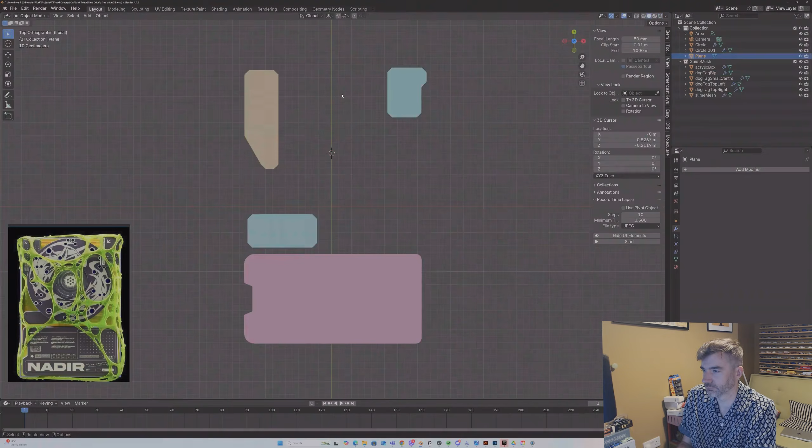So go into edit mode, view from the top, and then make sure you've got everything selected in edit, UV, project from view, go into our UV editing, and we can just hit the X button to remove that. Hit A to select everything, and we're just going to scale it up so that it fits nicely in our UV space. And then UV, export UV layout, CD design UV. Make sure we're at 4K.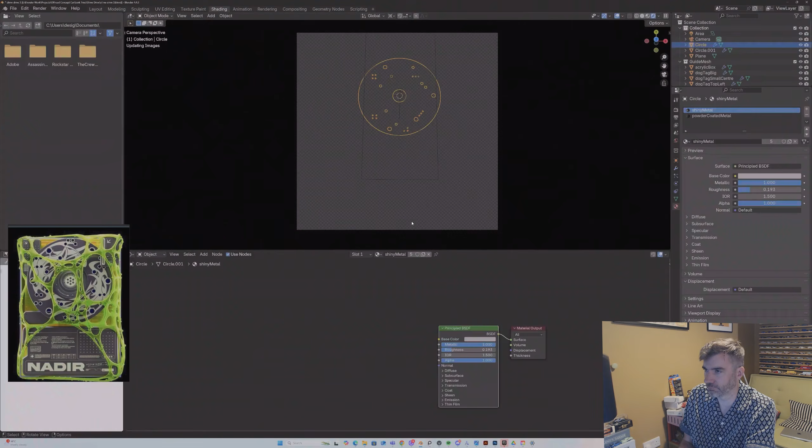And then I've actually already made one, so we'll go into our shading tab. And it's exactly the same idea. So let's go into our powder coated metal. And you can see that we're actually using the same material here, so it's already got our image, so we're going to duplicate that material and call it CD powder coated, because we want to drop a different image in here.

And I've created this kind of tribal tattoo type design, which doesn't line up perfectly on this one. If it doesn't line up exactly the way you want, you can preview the image up here, and let's make sure that we're working in a way that we can see. So if we move our UV about, we can position it where we want. So I think we're looking good.

The only thing left that I want to change is I want to take this material here on the spindle, and we'll make it a white plastic. So new, got a base colour of that. Let's set our roughness pretty high, and I just want to bring in a subsurface weight of 0.2, so it's slightly see-through and slightly resiny. And I think we are basically done with the scene.

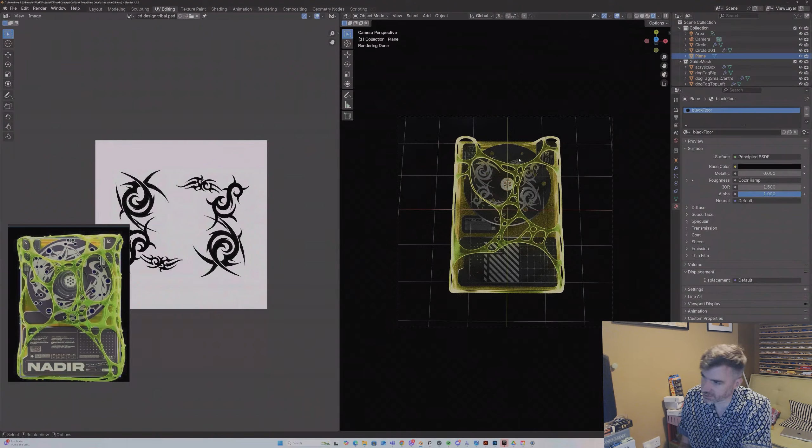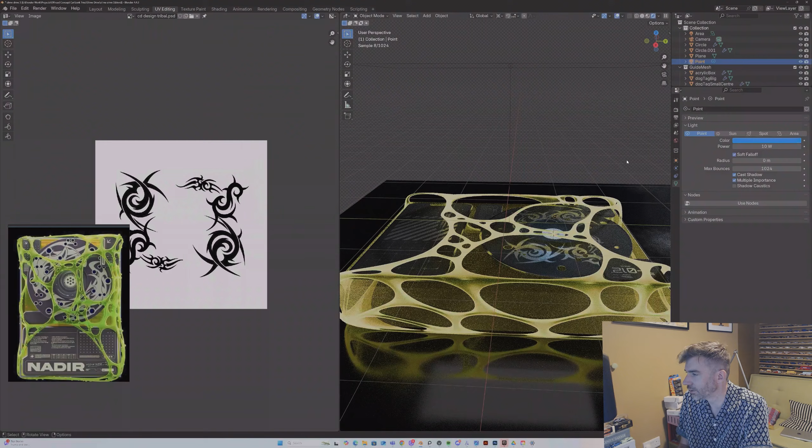Only thing that I would like to add as a little bit of interest is a little light shining through one of the holes. So I'm going to make a point light and bring it up so we can see it. And let's set the colour to like a blue. And let's position it. Let's see where's a good spot, our overhead view. So we want it to shine through one of these holes like this. So we'll just put it under the CD object.

And let's increase the strength to 200, see what we get. So it's just giving like a little backlight effect in there and just adding a bit of interest. And let's do a quick render and see how we're looking. Okay, so I think we're looking good. There's a few little finishing touches I want to add to this scene to just give it a little bit more interest and realism. And they're all nice and easy to do.

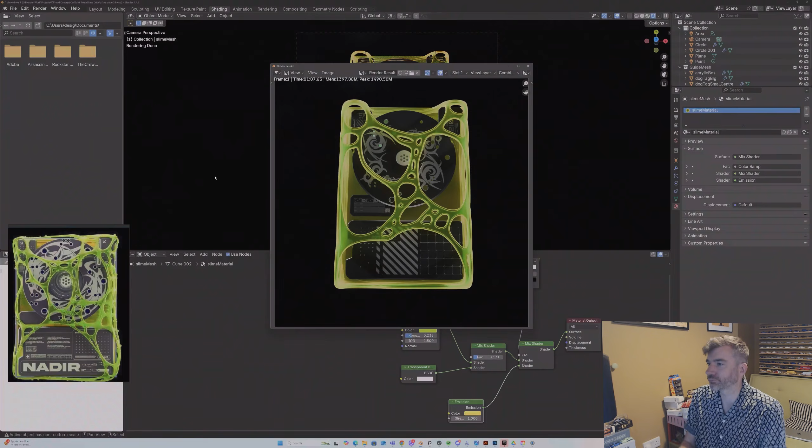So let's have a look at, I don't know if you can see this, like little bubbles in the slime. So we are going to use some more modifiers to make this. So let's tab out. And we're going to make a Shift A mesh. Let's make a UV sphere. And we can just put it here at the moment.

Just tab back. Just hit the full stop key and go to bounding box center again. So we're just going to scale this down. That should be fine for now. And shade auto smooth. And we're just going to call this bubble, and I want to use the slime material that we've got.

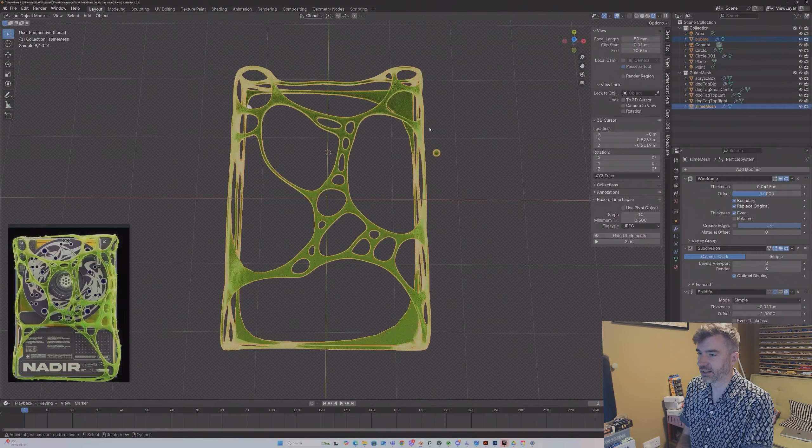So I'll just check that's looking right, and what we want to do now is select our mesh here, and then we're going to add yet another modifier at the bottom. So we're going to go to search particle system, and let's just select our mesh and our bubble for now and edit in this mode, so things should be a bit faster. And then we are going to go into our particle, and we're going to change emitter to hair, and that in itself is quite a cool effect, but it's not what I'm looking for.

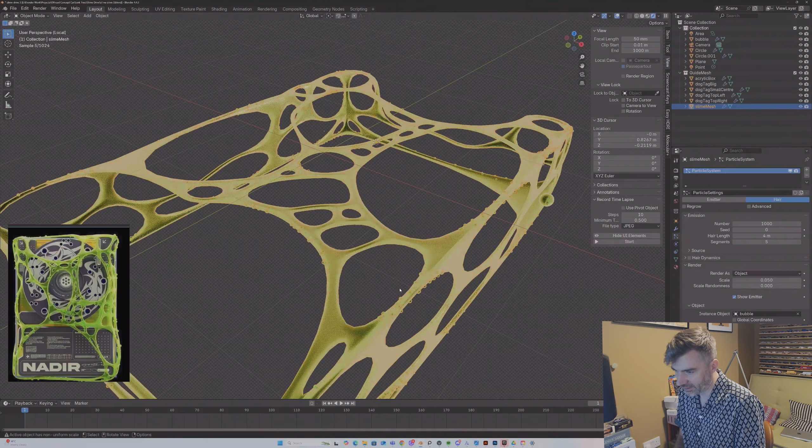So if we go to render, and then we're going to change our render as object, and then choose our object here. And you can see now we've got these kind of like little bubbles in and out of the surface. So let's increase the scale a bit and the randomness.

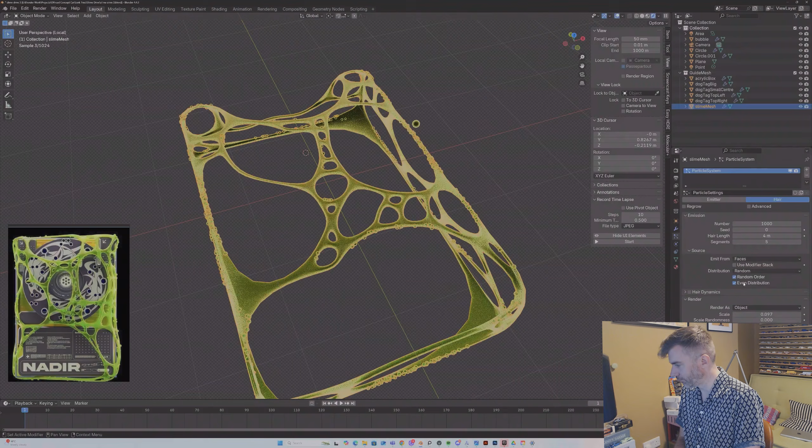And let's go to source and emit from volume. No. And let's change the distribution to random. Change distribution to random and turn up. Yeah, that's looking good. We can bring down the number,

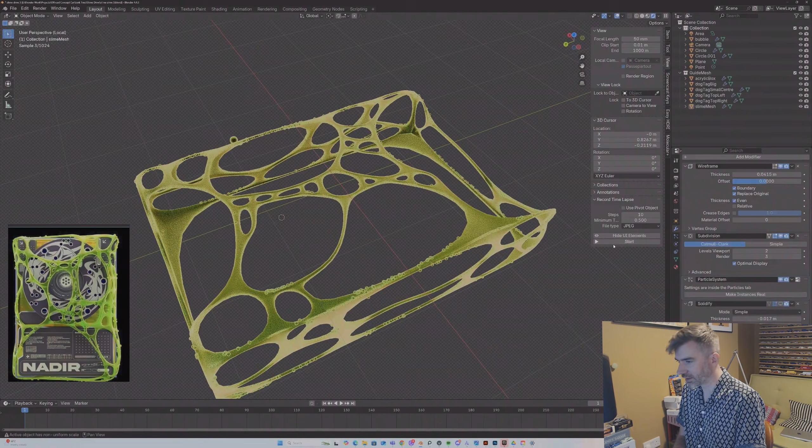and if we bring down the hair length, they will now be more inside the mesh, and we'll just increase the scale again. So we've got these kind of interesting little organic gloopy bubbles, and I think if we pull our particle system up before the solidify, that didn't make any difference. There we go. If we check use modifier stack, they're now sitting more inside our mesh. Nice. And we can just pull this off to the side so it's out of shot.

That's looking really good. And now I want to add in a volume. So we've done this in previous tutorials, but if we hit Shift and A, mesh and cube, so we need to make a cube that fills our entire scene, and then we're going to call this volume cube. And with that selected, we go into shading and give it a new material, and we're going to delete this and go Shift A, search volume scatter, and we're going to connect the volume to the material output. And you can see we've now got this fog.

If we turn it down a lot, so maybe let's try like 0.003. Needs to be even more than that, I think. And we turn up our anisotropy. I need to go on a pronunciation course. We might need to make this even less foggy. You can see it's just giving a little bit of, almost like you could let off a smoke machine in the room. It just makes things look a bit more natural and realistic.

So let's do another render. A bit of advice, because these renders can take a long time, for now maybe set a time limit on your render. So I set it to 1 minute here. Also something to just check is on your slime mesh, make sure that your subdivision modifier in render is bumped up to 3, otherwise it might look a little bit faceted.

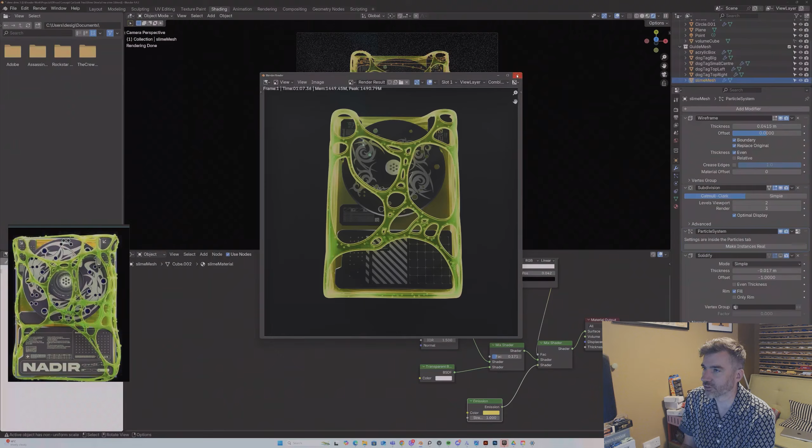Okay, so we're now going to do 2 more things and then we're done. So let's go to compositing and turn on use nodes, and I want to add in a viewer node, and we'll connect our image up to the viewer, and you should be able to see our last render. And what I want to add in is lens distortion. Add in a lens distortion node, so we'll connect image to the image slot and then image out into here.

And then if we dial up the distortion, you can see you can do all sorts of weird stuff there. So I don't want to use that distortion, we'll set that back to 0, but I do want to change the dispersion, and you can create this kind of slightly out of focus look, and you can really push it to get some very cool edges like this, which might be the effect that you want.

Let's change it to projector and see what happens there. I don't think projector's working well for me. None of those sliders have any effects in that. So it's just a case of playing around until you find the effect that you want. Let's not use projector, and let's just put the edges at 0.1. Might go even half of that, so 0.05. Yeah, there you go. And it's just given that kind of colour separated edge. Just looks a little bit more realistic and a little bit more sci-fi, cyberpunky.

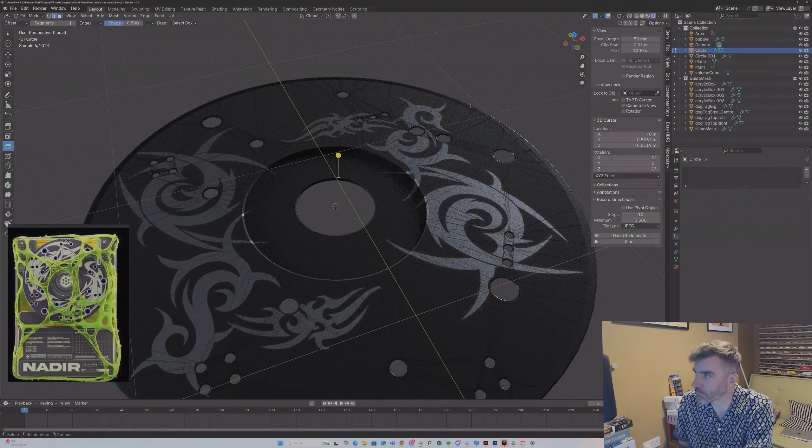I've also just realised I forgot to make the glass shader that goes in the centre of here, so let's quickly do that now. So we're going to shift into viewport mode for speed, and we'll select this edge, and then if we go to select more, now I've got mine mapped to a shortcut so I can select faster. So we're going to make another material, glass, and we could actually use the acrylic that we've got in there for now and assign it. And let's rename, so duplicate it by hitting this button here, and then rename it CD glass.

And then we'll go to the shading tab, just wait for everything to fire up. And that's kind of looking cool already actually. I don't know how much I want to change this, but we could give it maybe a blue colour, or we could keep it completely clear, whatever effect you'd like. And then you can bump down the transparency. Yeah, I think we're looking good.

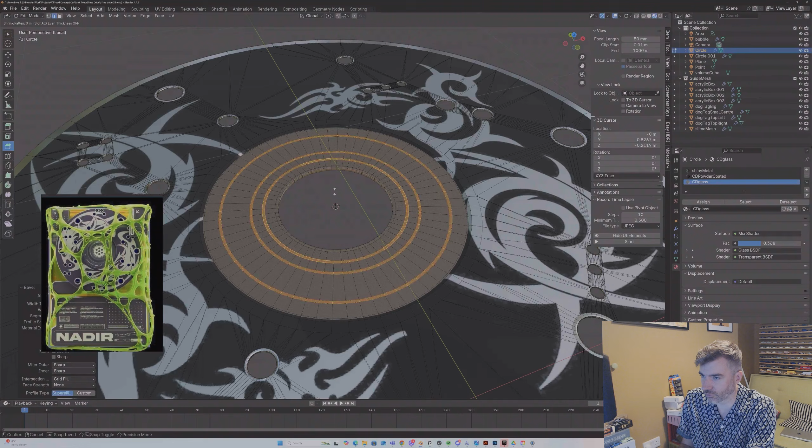I actually just want to put in a little bit of detail into the surface as well. So we're going to make a couple of loop cuts. It's all just things that can catch the light. So I'll select all three of these. I'll go into layout to make sure we've got all our tabs. We're just going to bevel these edges. And then Alt-E and extrude along normal. We'll just bump them up slightly. And then when we go back into our render mode, it's a little bit hard to see in my preview, but it should just provide a little bit of visual interest to that section.

So I forgot something very important at this point before we render, and that is that at the moment all of my nodes are plugged into the viewer, so we just need to take this and return it to the composite, and now we'll see it in our final render. So if you're finding that your effects aren't showing, make sure you do that. And there you go, final render. I hope you got a lot out of this. It's a nice and quick and easy one to do. I really enjoyed putting it together.